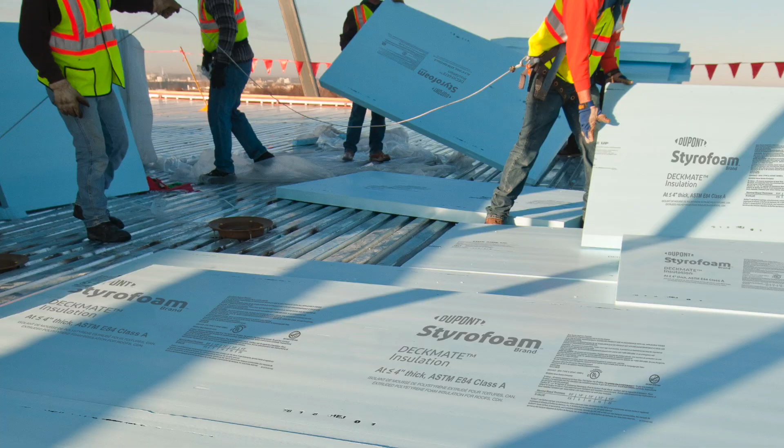My name is Andrew Miles. I'm one of the field survey engineers with the DuPont Building Knowledge Center. Today I'd like to present 5 key mock wall considerations.

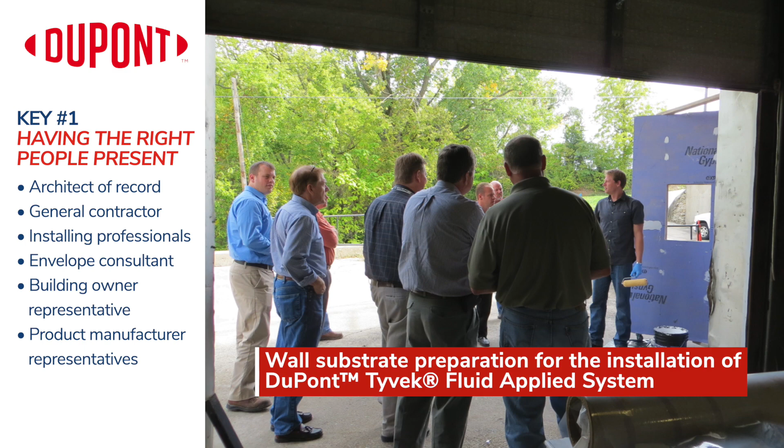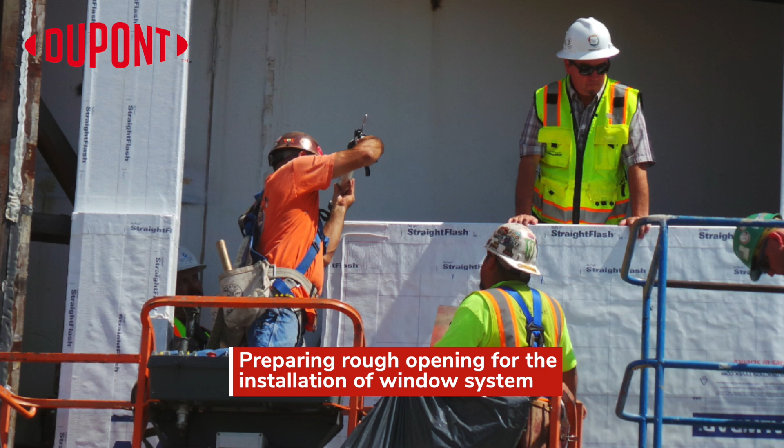Key consideration number 1, having the right people present. The mock wall attendees can include any combination of the following: the architect of record, the general contractor, the installing professionals, the building envelope consultant, the building owner representative, and finally the product manufacturer representatives. It's important to ensure everyone is aligned on roles and responsibilities, installation sequencing, product manufacturer guidelines, and wall system tie-ins, as each of these items can impact the construction timeline if done incorrectly.

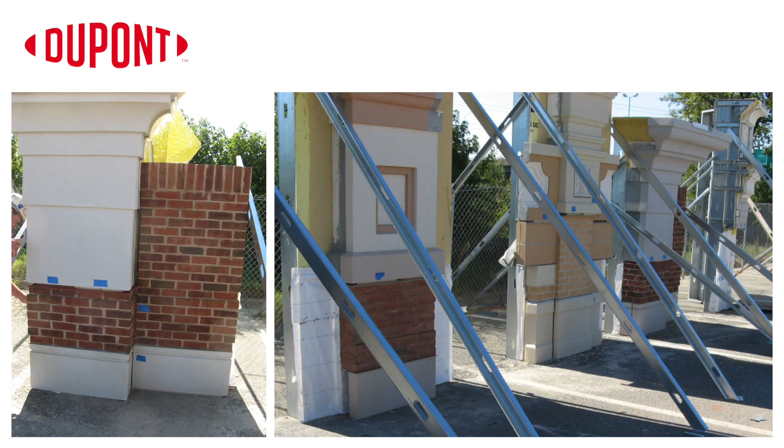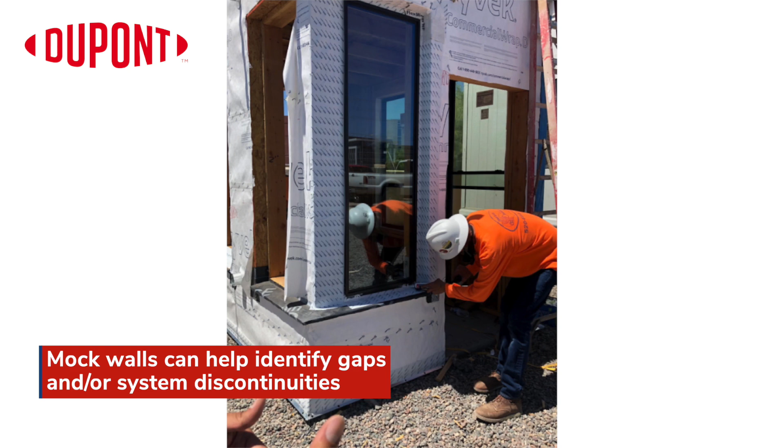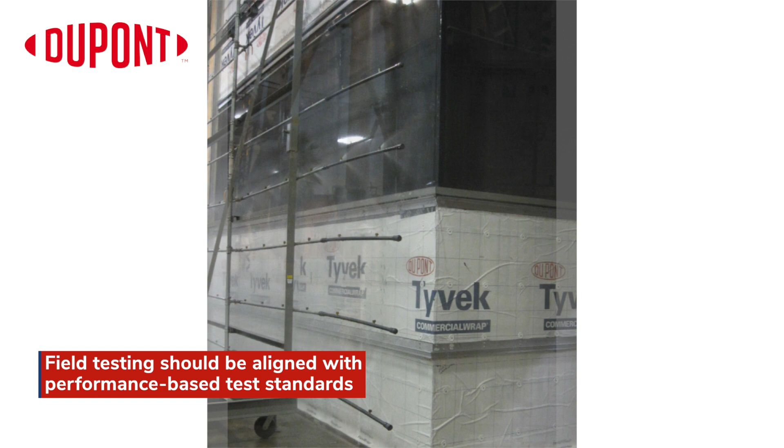Number 2, what is the purpose of the mock wall? Would it be based on the exterior facade and how transitions between the various facades would look? Is it to show how products are to be installed to address specific building conditions? Is it to identify gaps in how the various building components are integrated? Is it performance-based? Will the mock wall be tested? If so, to what standards? Identifying the answers to each of these questions would be essential to understanding the purpose and determining the value the mock wall will provide before and during the construction process.

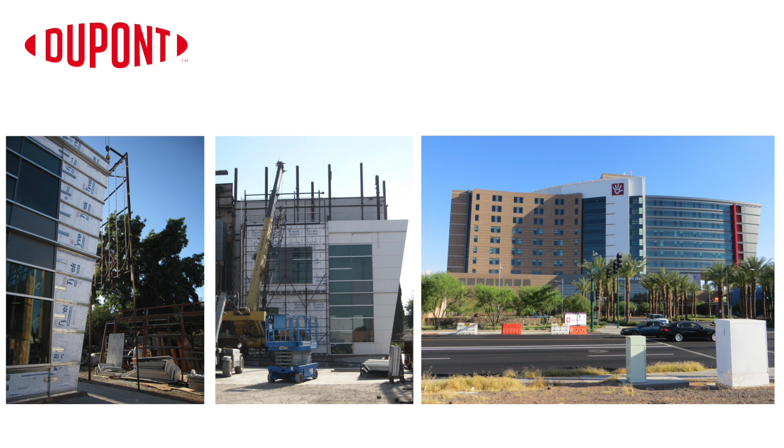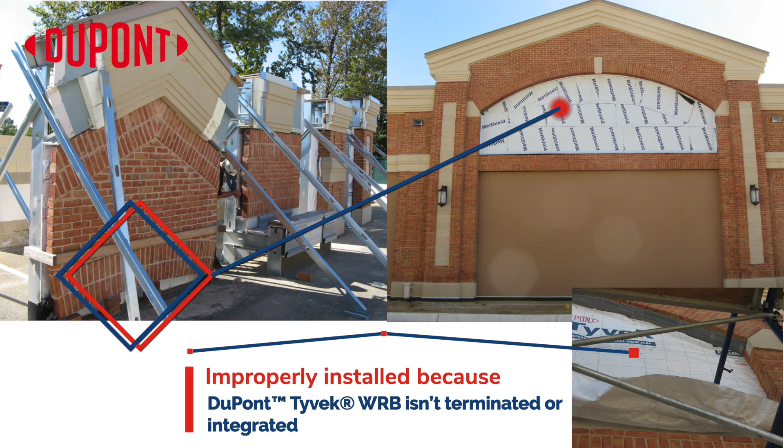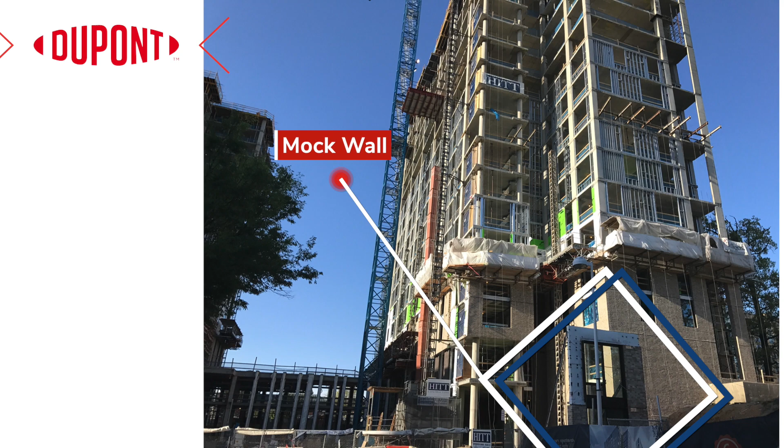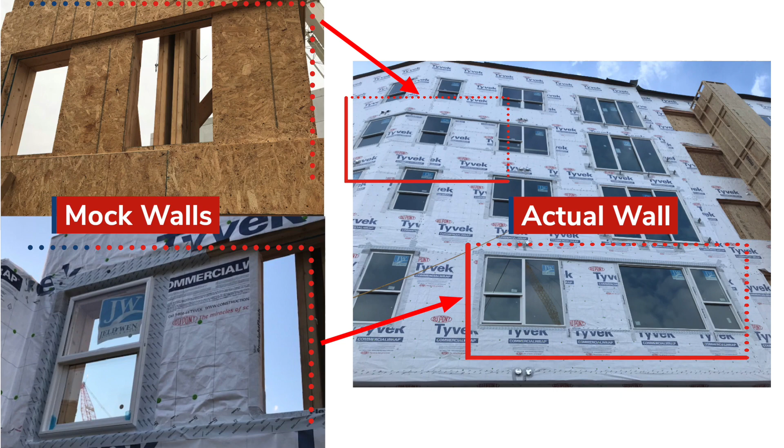Key consideration number 3, the mock wall should be representative of the actual building conditions. It's important to ensure the mock wall conditions accurately represent the intended building design and that the product installation details are easily transferable to the building structure. If the building design is relatively simple, with let's say 1 or 2 standard window types, then the mock wall itself could be relatively simple. However, if the building design is more complex, with lots of wall plane changes and an array of window types and conditions, the mock wall design may need to be more dynamic to ensure the critical building conditions can be properly captured.

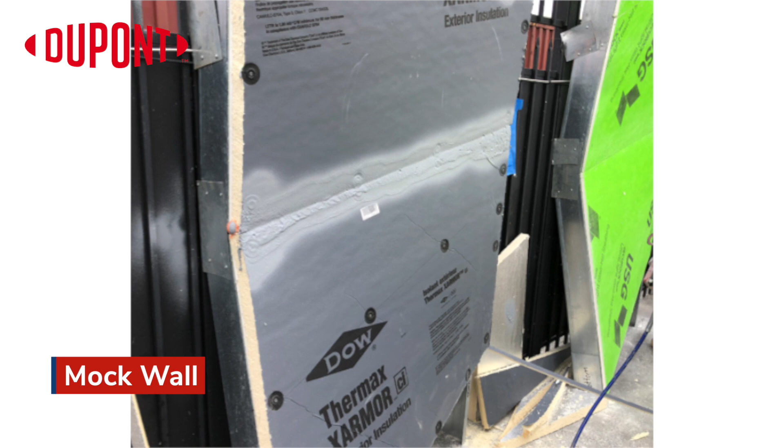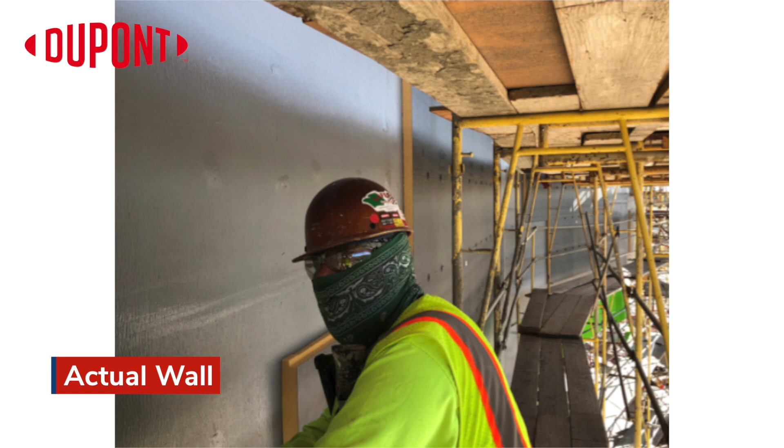The architect of record and general contractor must determine what building conditions are most important to capture during the mock wall build. This decision could be based upon the conditions that cover the largest majority of the intended wall space, or the mock wall design and build could be focused on obtaining clarity from the manufacturer's representatives on the installation requirements for the more complex window and wall conditions.

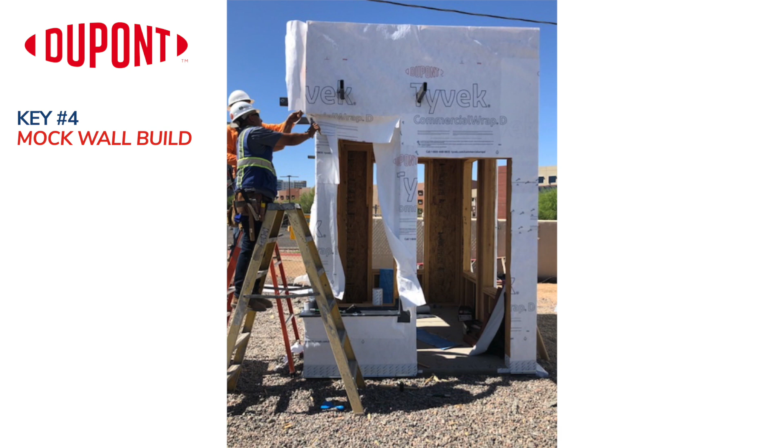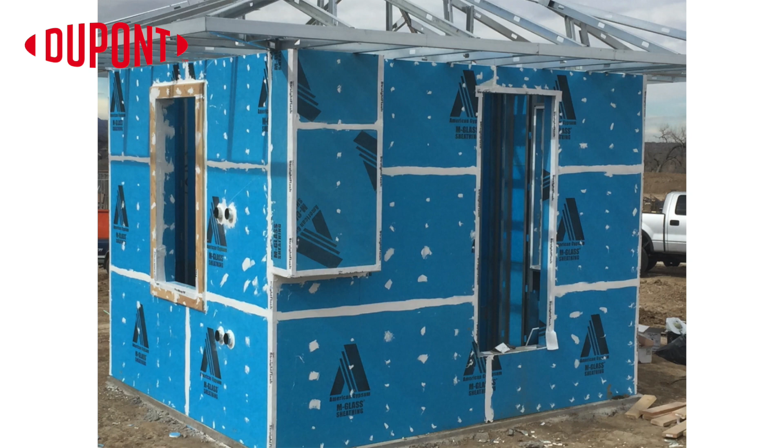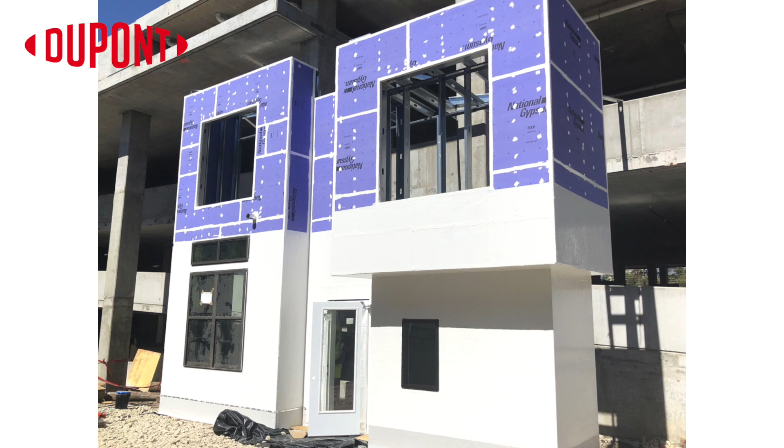Number 4, the mock wall build. What determines the mock wall size and build? It may depend on architectural needs and circumstances. If the build can be administered with a smaller footprint and accomplish the designer's intent, then maybe that's all that's needed. However, if size does in fact matter, how many conditions can a single mock wall address before it becomes too difficult to understand what's captured? The mock wall designer must determine if the critical building conditions can be captured within a single large mock wall, or if multiple mock walls will be required to ensure the critical conditions can be properly captured.

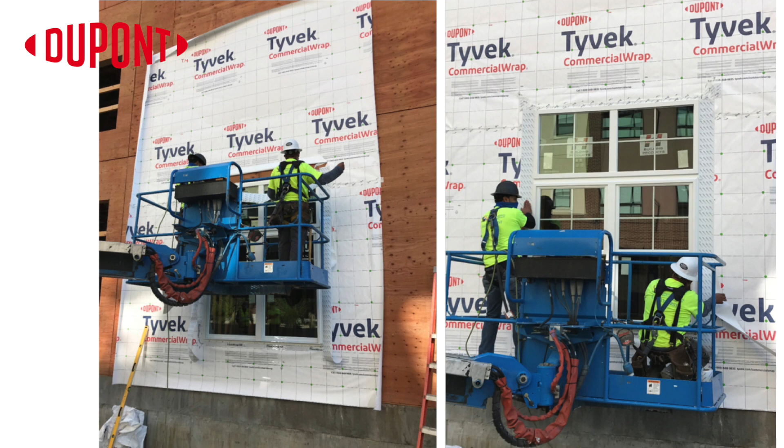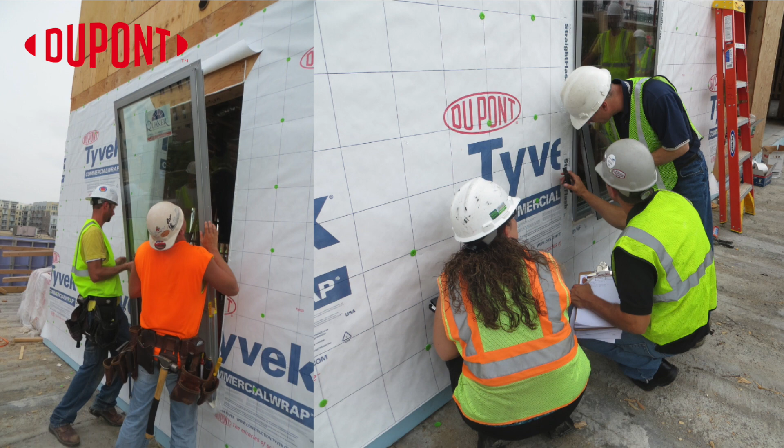The designer must decide if the mock wall build would be administered on the actual building structure or if a standalone wall assembly would be required. Of course, there are pros and cons to each design. Prior to the build, the project team should understand what conditions are going to be represented and why. Documenting the build of the more complex mock wall designs may help to answer questions that could arise during other phases of the construction process.

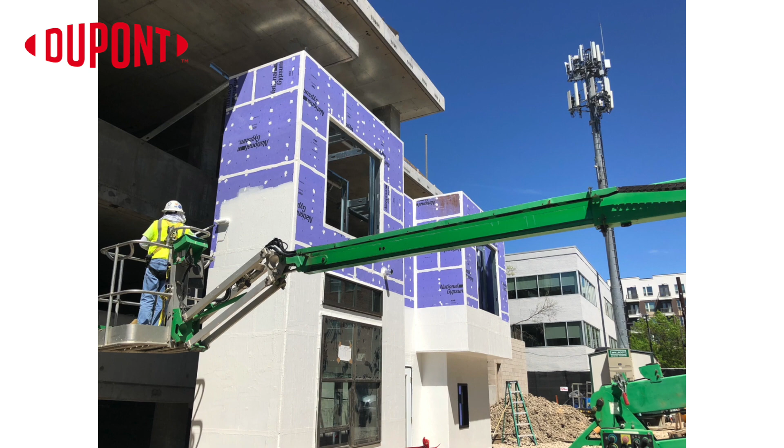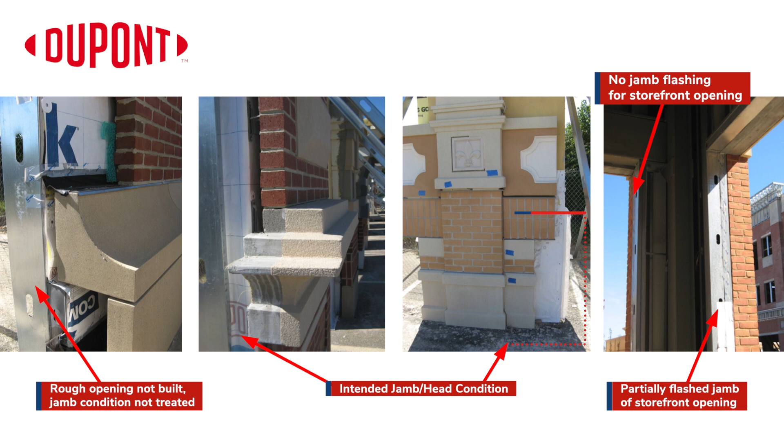Number 5, a mock wall is a great opportunity to identify areas of concern. If the building is designed to have windows, but the mock wall build does not, how do you ensure the window openings will be properly flashed prior to the installation of the exterior facade? It's important to understand what building conditions aren't captured on the mock wall and why.

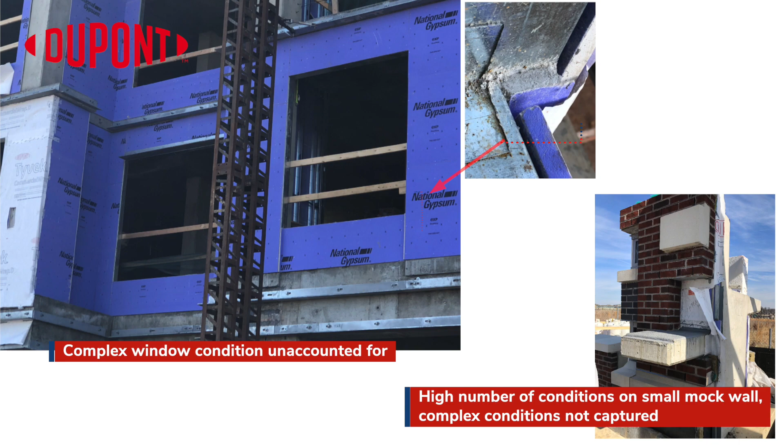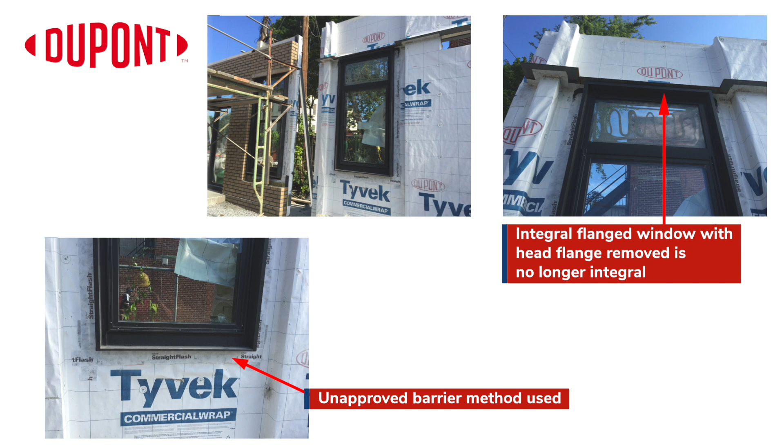If the mock wall build and/or the product installed differs from the architect's design and/or the product manufacturer's published guidelines, this could be problematic. Most manufacturers require their guidelines be followed, as deviations from the published details could compromise the product's integrity and/or design performance, resulting in an unwarranted condition. Having a constructive mock wall discussion during the pre-construction meeting may allow the project team time to determine the best way to proceed with minimal to no impact to the construction schedule. Engaging the product manufacturer's representatives before and during the construction process may be essential to the project's success.

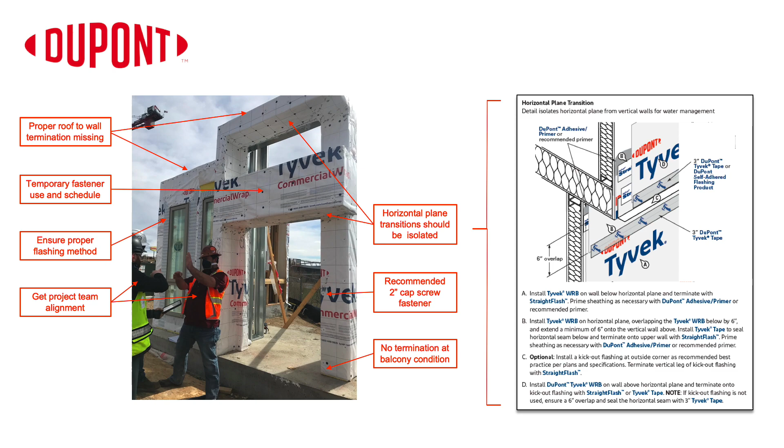I hope you found the 5 key mock wall considerations I provided useful.